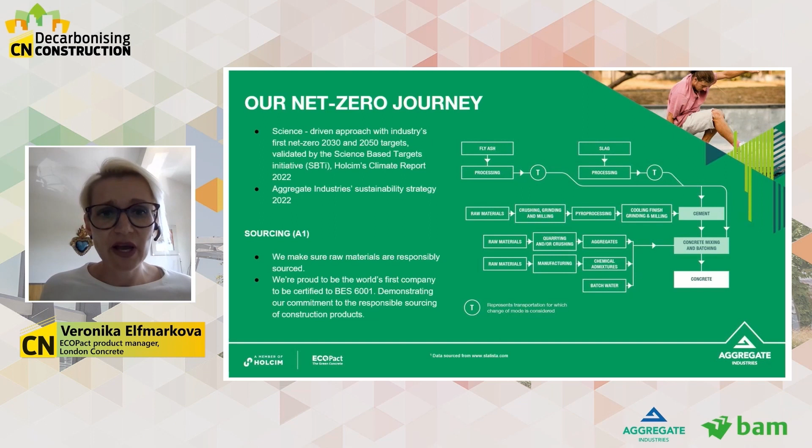Having said that, currently the industry doesn't really have any standardized method how to declare carbon values, carbon emissions, and hopefully we are going to get there soon. So we have chosen to go the direction of a science-driven approach, and we are part of the Science Based Target Initiative as Holcim, and we are working with Carbon Trust to develop all our carbon data. We have developed a tool for how we are declaring our values. So it's not just our own value, but it actually has third-party verification, and we are not only looking for a number itself, but from the bigger picture, we are looking into sourcing, transport, how we are actually transporting all our materials to different locations, and if we need to bring it from outside of the UK, is that taken into account?

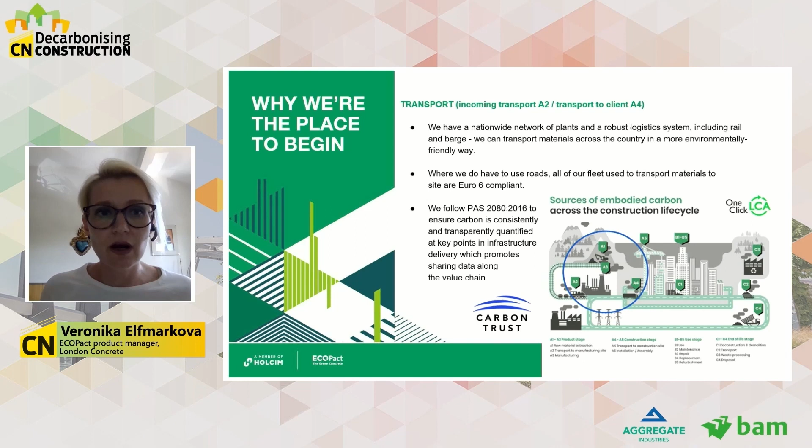We are as well quite keen on exploring how we can transport by rail, and if we need to use roads, how we can improve that side of it. At the same time, the processing is as well a key thing for us. So really, in a bigger picture, I wanted to summarize that if we are looking into carbon, as a company, as a business, we are looking into all life cycle assessment stages we can participate in. So that means for us A1 to A4, which I believe is the right approach, and it's not only just one number. If we can split it, we can show that we are transparent about it.

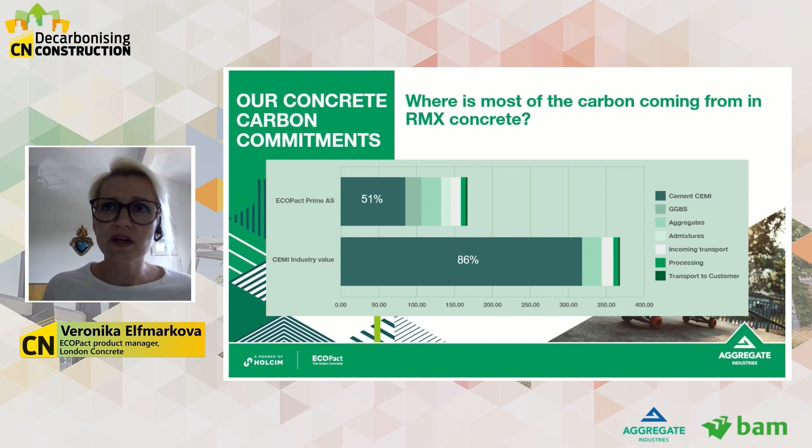Because most of the time people are asking the question, so what about transport? What are you doing about it? And if you see here, the transport and the processing is just a small fraction of what we need to do in order to decarbonize the ready-mix sector. We have to focus on materials and how we are using our materials. As I mentioned many times, concrete is overlooked and as well seen as not innovative, not progressing. Ready-mix suppliers are seen as not doing enough in order to decarbonize. I agree to a certain extent, but at the same time, there are already initiatives and strategies in place for how reaching net zero can be accelerated, how the transition towards net zero can be done much quicker than what we are doing at the moment.

And I would start probably firstly just by getting rid of straight Portland cement mixes in a project. So that's what we are trying to do with our clients and with our projects, where if we see someone, we are trying to offer a different solution where we can reduce and optimize the concrete mix and then consequently reduce carbon.

So I believe there are two different ways in the ready-mix sector we can focus on, and we are doing that. So there is this bit which is still not innovative. It's been there for a long time. And this is the group of concrete mixes where you are using high replacement levels with supplementary materials. If it is GGBS, fly ash, limestone, microsilica, whatever it is, which is currently complying with codes, we are using that, and we can reduce carbon by optimizing the concrete mix at this stage, because you can have replacement levels up to 80% and still have quite a low carbon concrete mix.

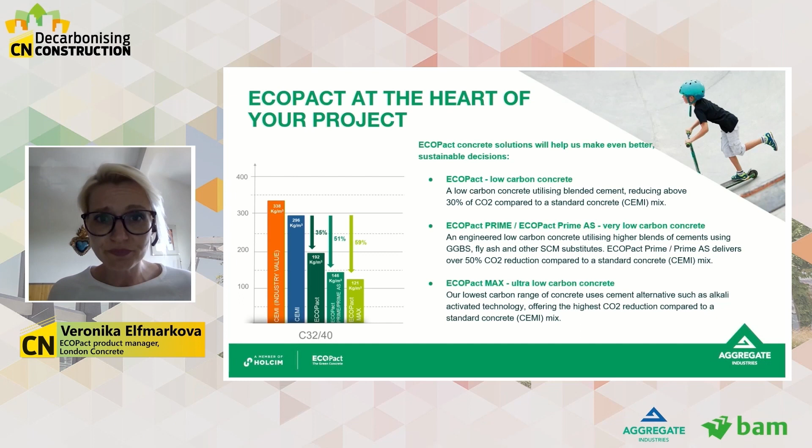The construction industry, from my view, is quite slow to adopt new technologies. It takes quite a long time to go through the process of reviewing, testing, and getting everything updated, which is a bit of a shame because the technologies are there which can be used. Probably from the technical readiness it's still not there, but we are still developing. We can do that in the background. And if there is more push from government, from industry, from clients, it can be adopted much quicker. That's just my personal view, possibly. But we have the technologies there which can be used.

So I think that brings a few questions, really. First of all, there is quite a resentment within the sector to use high GGBS mixes because of supply chain issues or availability, which is questioned. At the moment, I would say there is enough GGBS globally, but with time there is going to be a shortage, and we will need to look into different supplementary materials which can be used in order to decarbonize. So there's resentment towards these mixes which comply with standards and still use Portland cement as an activator, essentially. And there is a demand for alkali activated concrete where you don't have any cement. But the embodied carbon is still more or less the same as if you have compliant concrete.

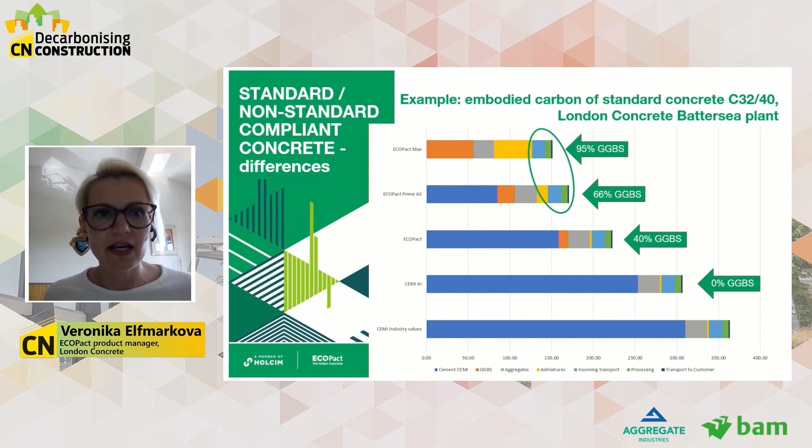As my manager always has as an example: we don't want to be replacing potato with pasta, both of them are carbs. So we really need to think about it and collaborate, not only within the sector, but with academia, across the chain, just to make sure that we are doing the right thing.

I just wanted to give you an example, talking about the alkali activated concrete. We've done the first structural concrete in this technology here in the UK. We've done it for COP26, just to demonstrate that it is possible, that these technologies have a future, and there still needs to be a lot of work done in the background. This technology is tested against PAS 8820.

It's not the only technology in the market, and yeah, there is a good future ahead with it if we can make it work, or possibly as well if we can focus not only on GGBS and fly ash, which are currently activated, but if we can use something different, if we can look into different waste products, probably from different sectors, if that can be used for this technology and applied in the ready-mix sector, in the industry sector.

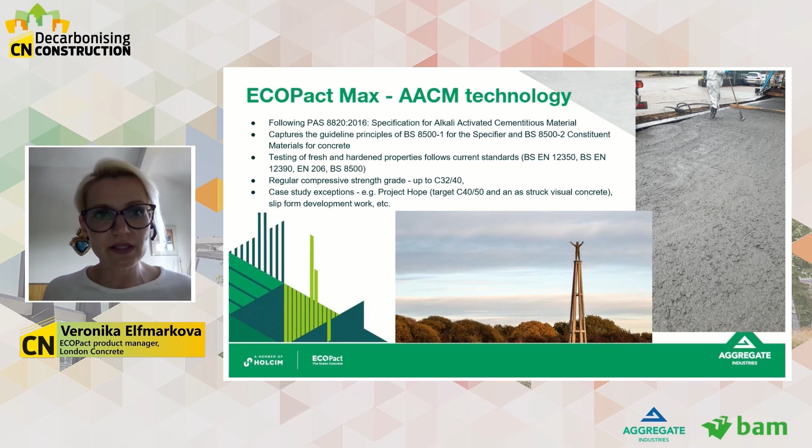But as well, just to demonstrate that we can accelerate and we can use something at the moment, our mixes or our concrete solutions, which are used at the moment with high blend levels, and they are still going to perform against the standard, and they are not going to affect your program. Because sometimes with all these high blend mixes, the feedback which we are getting is that it's going to affect our program, and affecting the program negatively means more carbon, and as well it has an economic impact.

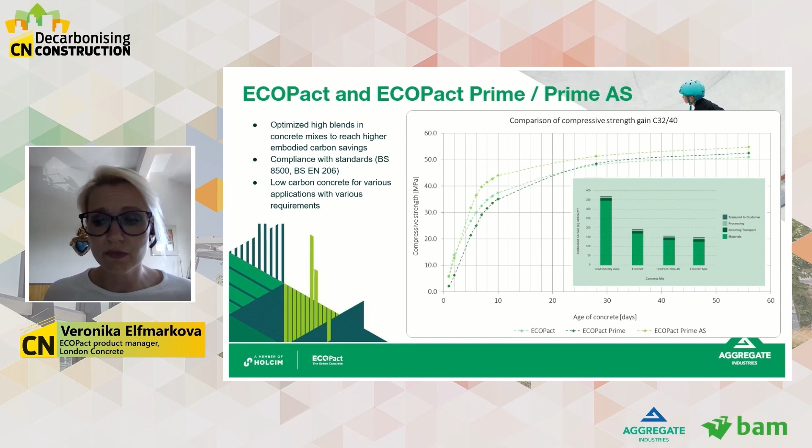So there are solutions in the market, products which we can use, even if the high blend levels are there, and they don't need to affect your program, because, for example, with one of our products we can use high blend levels and still perform as low GGBS replacements.

So I believe really the engagement for a project and being aware of these products needs to happen at the beginning. Because that never happened in the past, that the ready-mix supplier was engaging, for example, with the specifier, with architects, engineers. And I am confident to say that the engineering practices or architects don't really know what can be offered by ready-mix suppliers. Many times not even the contractors we are dealing with on a daily basis know.

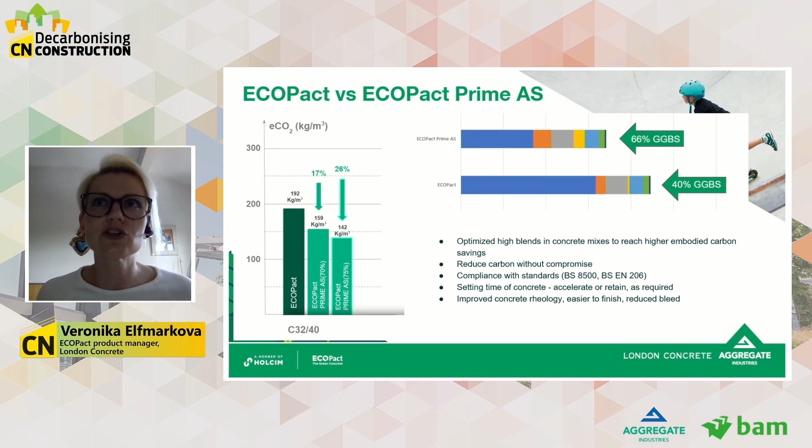So the engagement and the collaboration, I think, is key in order to decarbonize and make the change to accelerate, actually to reach net zero by 2050. Because if we don't do it now, I don't think we will be able to reach it and reduce the emissions in the sector.

And having said that as well, I mentioned at the beginning that there is no standardized method for declaring carbon values, which I think is lacking, not only in this country, knowing as well that across the globe there are already countries where it's a must to have a standardized method. So I believe that this needs to be a next step, for us to really have standardized methods in order to see where we stand with concrete.

From our end, we have gone down the route of environmental product declarations. It's not there at the moment, but we have third-party verification at the moment with Carbon Trust. But we are going through the path of EPDs and having them available for mixes, because that's going to give us transparency and clarity about where we stand with projects, and we will be able to help reduce scope 3 emissions for our clients and monitor that through the years to see how we are progressing and that we are not going backwards.

As well, just to engage from the beginning with our clients, we are talking to engineers, architects, we are trying to educate, we are trying to show them what we can do at the moment, because I think it's a bit of a shame that ready-mix suppliers don't have kind of the right, well, they have the right, but it's not the direction which is taken, to say what we can offer and how we can help with the specification.

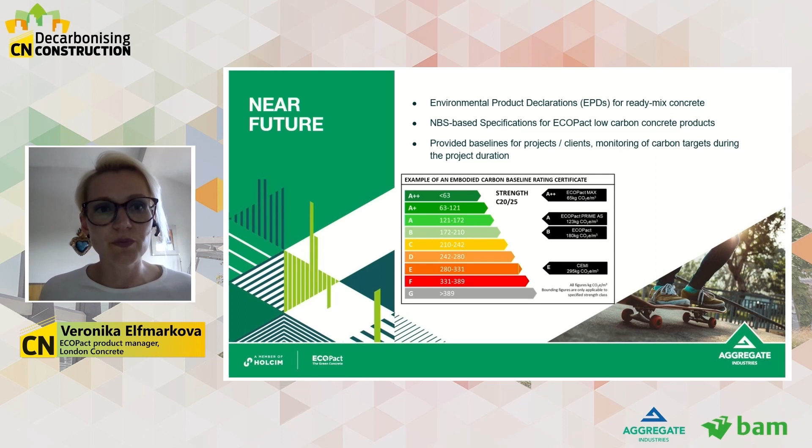And as well how we can apply the bigger idea about circularity and sustainability for the ready-mix and cement sector, because I believe we are taking bits and bobs from the strategies, and everyone is doing their own thing. But the basics, really how we can together implement all of this and how this can be translated and help the companies to develop further, that's still missing.